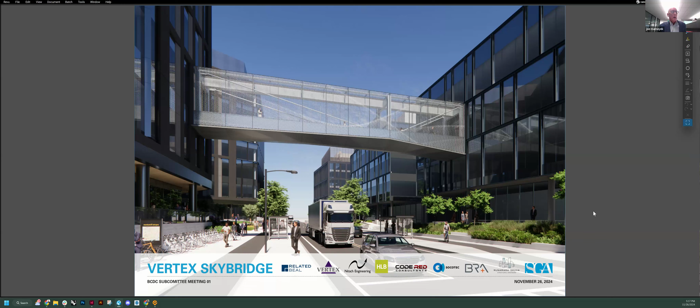Great, fantastic. We last met on 11/12, and we had a wonderful presentation, great feedback. Let's go to the next slide. These are what we heard at 11/12, and I want to focus on next steps, which is in the far lower right-hand corner, and that's essentially the agenda for today. What we've been asked is to bring a sense of scale and a scale comparison to the Liberty Mutual bridge, which you're going to see more metrics on. We've been asked to look at alternative site studies that we contemplated over the course of this design, materials, patterns, lighting enhancements, and how the bridge interacts with the public realm. You'll see that in a little bit more detail.

The impacts of the visual corridor, how that has been thought about and resolved in many ways. And then looking at some additional artifacts and materials that we looked at, 3D modeling, which we used during the course of the design. We'll share that today. You're going to see that in-depth thinking. And then last, what are the big drivers? What are the big ideas that have led to the design and the sense of beauty? Next.

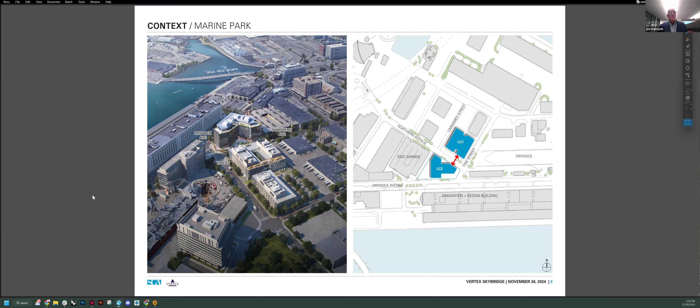Just a little bit of the sense of context. LC1 is existing. That's where Vertex Pharmaceuticals is currently. LC2 is under construction, and the bridge is, in essence, connecting the two buildings, just to give you a little context on that. And next, I just want Chuck to remind everyone of the reason for the bridge.

Yeah, thanks, Joe. So just as a recap, we did talk about this in our last meeting, but it's really important to underscore the point that the bridge is really not an amenity or a convenience. It's a thoroughfare for moving science and product from one manufacturing facility to a connecting facility that does all the reagent studies and assay studies. So they're really symbiotic in nature in terms of the facilities' requirements to have this connectivity. And that's a really important component with regards to the bridge utility.

Again, as a recap, both facilities are dedicated to cell therapies. Most importantly, our type 1 diabetes therapy, which is a one-of-a-kind therapy, a single dose therapy that is time sensitive in its nature in terms of its deployment to the patient.

I think I mentioned in our last meeting that we have a 72-hour latency from the final drug product to getting to the patient. So the importance of a quick and expeditious thoroughfare between manufacturing and the testing of the assay is really incredibly important to us getting to a full commercial capacity out of these two infrastructure assets that we have. And the other, I think, really important component is the product is environmentally sensitive.

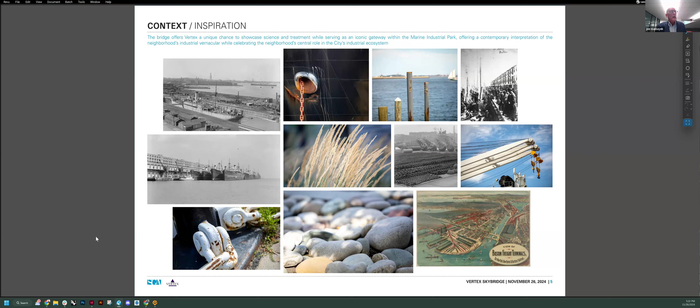And then just a quick reminder that when we're looking at this area, it's deeply rich in history and textures and landscape and features. So this becomes an iconic gateway and a moment that is really important to the project. We're looking at the contemporary interpretation of that environment, not to copy it, but look at that contemporary interpretation of the industrial vernacular.

Next, what was really important was our study and research that we did with very successful bridges in Boston. Off on the left-hand side, you can see Liberty Mutual, top and bottom at different angles. You can look at the transparency, the lighting, and the elegance of that bridge design. On the right-hand side, we have samples of the Boston University Medical Center, upper right, and lower right is Boston Children's Hospital. All of these, look at transparency.

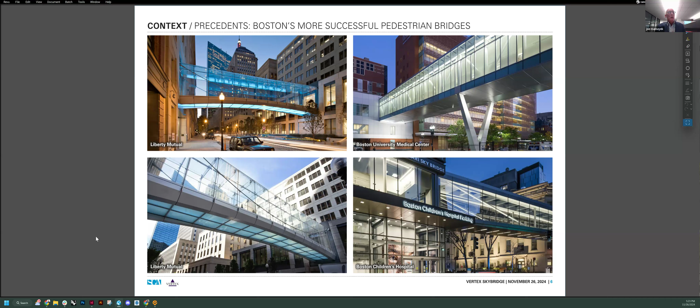It's not just into the bridge, but being able to get a sense of the mass and architecture that is beyond, which is very nice. The lighting takes on another kind of transcended feature that really gives life to the public realm, which is fantastic. And what's happening with the features that are underneath the bridge as well. I'll look at these things later on, but some of these have structures that actually go in the public realm, and they have that impact, such as the Boston University Medical Center.

For bridge comparisons and the metrics, off on the left-hand side, we have the Liberty Mutual Bridge. You can see that cross-section of the street and the adjacent buildings themselves. It's a span of 83.5 feet, 22 feet clear. It has a camber structure for the floor, and then a nice cabling structure that happens above. So you can see that.

And in comparison to the Vertex Bridge, you can see the span there of nearly 100 feet with a clearance of almost 34 feet underneath that, with the nice shaping of the public realm down below. What you have there as you enter both buildings is a sea level rise. It explains the transition over here.

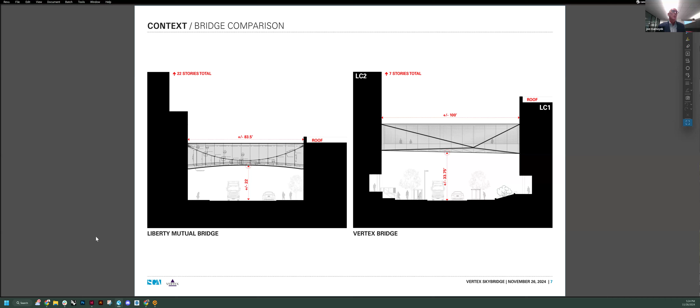The other thing that we measured, and it was really important to the design, is how the bridge itself touches both of these buildings, and having enough canvas, quote unquote, for the bridge to have some of that space around it. Next, please. Here's just a plan comparison. The Liberty Mutual Bridge up above, you can see the length, 83 feet plus. Its width is 12 feet compared to the Vertex Bridge, which has a span of 100 feet and a width of 14.5. Those are some nice metrics of those two bridges.

So a little bit about our thinking from a team design approach and opportunities. These are the three opportunities that we were looking at. The outer ones that are gray were closer to intersections, and certainly the one on the right-hand side. As that moves closer to that intersection, we're a little bit concerned about the definition of the architectural massing and edges. So it competes a little bit with that.

And as soon as we go to the preferred location, that really becomes secondary to the overall expression and experience in the urban environment, and certainly it respects both entryways. The other thing that's really important, as it moves to the midpoint, it has synergies with the programs of both buildings, which are great assets there, and also the preferred connection as it connects into the lower building, LC2. The way it hits the more solid portion of the building, you'll see it in a little bit more detail in a moment. And Joe, about halfway through.

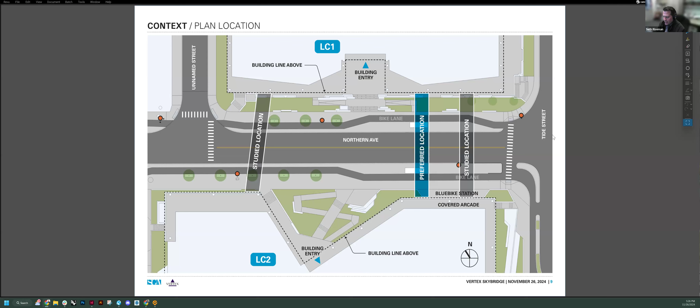Okay. Running through here, cross sections right in here, looking at the different levels of LC1 and LC2. There's a lot of synergies that are happening with the third level there because of the research and having a wonderful clearance underneath the bridge. Again, if we looked at the fourth floor, we looked at that. There's a little bit of canvas above that commercial manufacturing floor right there, in how it connects to the building of LC1. Next one, please.

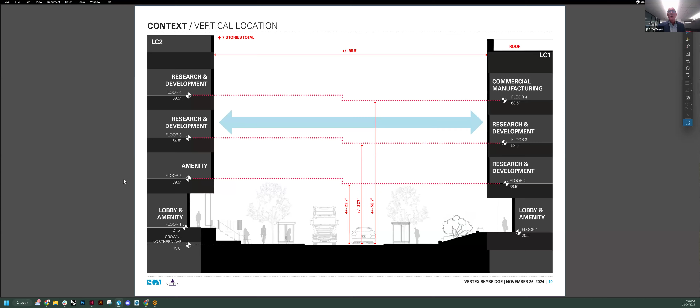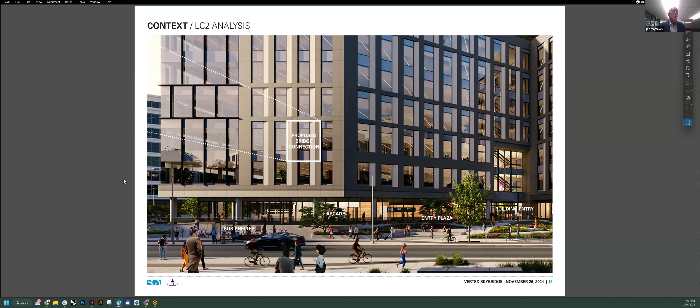Connection to LC2, just looking at where that is, respectful of structure, looking at the grid, the curtain wall. Go to the next one, please. Here, if this connection moves to the right, it's into the angled portion of the massing. Over to the left, it gets closer to the crossing, that intersection in the curtain wall. So we found a nice landing within the massing there.

Next, please. A little bit more detail here, really looking at the refined, you know, the transparency, looking at the materiality, looking at how you connect into those existing skins. And next one, please. I will transition to hand off to Klaus, who's going to go a little bit more into the design evolution. Thank you.

Klaus, you're on mute. Hi, nice to see everyone.

So you had asked about our process in the previous meeting. So we started with one of the very first exhibits that we made for this, which basically outlined 9 ideas for how we could structure this bridge, what the parti of this bridge would be. These are separated into 3 schemes, there being similarities across the rows here. So just quickly, at the top row, we looked at different configurations of more traditional truss types, building supported, column supported, and like a Vierendeel truss.

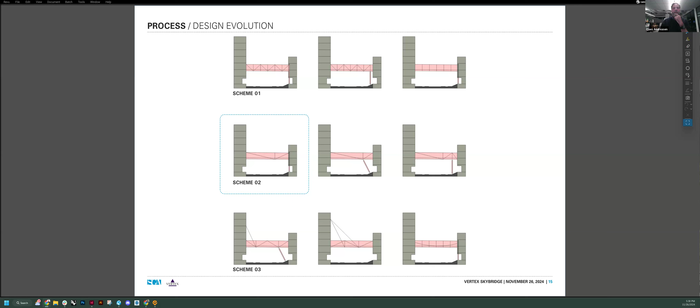So from that, we landed on 4 schemes. This is actually 2 variants of 2 schemes. So on the left, you're seeing what was the previous scheme B, but with a column, as mentioned. The second scheme envisioned that same idea, that eccentric truss, but without a column. Still in the early stages of understanding the structural implications of all these. And then the third and fourth schemes are variants on this cable structure from above.

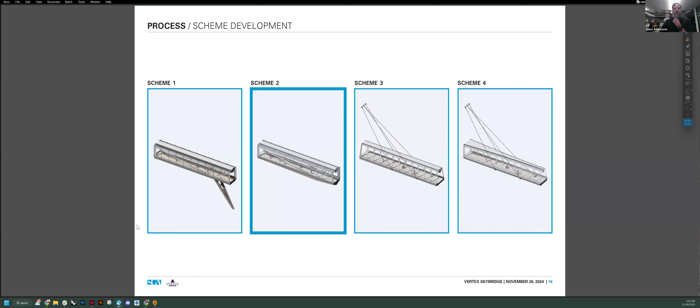So from that, we assembled all the comments that we got from the stakeholders, and we came up with four tenets for the design of the bridge. The first one is, again, that the bridge should have no supports in the public right of way. Second, that we would connect at the 3rd floor, because it was important that we had a large clear space underneath the bridge, both for the trucks and cars that are going through, especially the trucks, and also for the public realm that we worked so hard to establish in front of the new building and the old.

We wanted to make the bridge seem light, and again, that was the idea of that simple eccentric truss, coupled with a lot of the other decisions that we made about material and other things. And then finally, as Joe already mentioned, we wanted this to blend in and integrate really well with those 2 buildings.

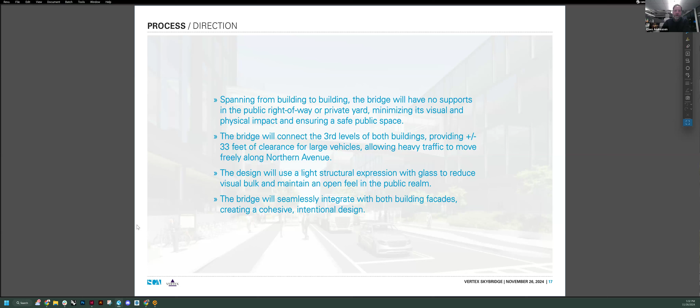So the first thing we did is think about the structure a little further. We took the upper structural long members, and we actually moved them to the center. And what that enabled us to do was really create these views from the public realm up through the bridge, much more transparent than if we had those bigger structural members at the corners. And again, that was a lot of structural work to get that to happen.

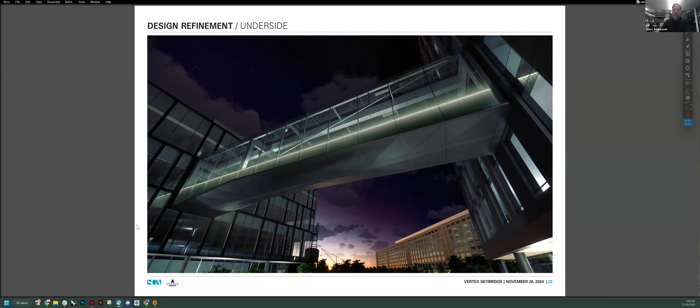Okay. We've been looking very carefully at lighting here, very subtle lighting. I know there were questions about where and how we're lighting the bridge in the last meeting. We made very deliberate decisions about this because we didn't want the bridge or the underside to be overpowering. So we were envisioning subtle lighting along the glass facade at the seam between the clear glass and the spandrel condition, and then all the other lighting within the bridge and below, let's say, shin level, so that no exposed luminaires are seen from the public realm. Here's another view of that.

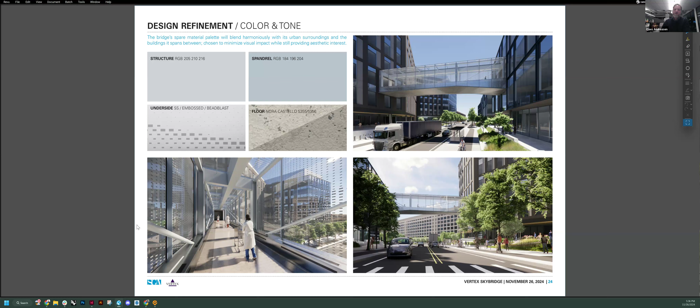Finally, materials, light and bright. We went with things that were very, very neutral, but also very lasting, like stainless steel for the underside. Obviously, our glass is triple paned, highly energy efficient, and low iron for maximum clarity. Like here's a diagram of the frit pattern, which I can get into more if you have questions.

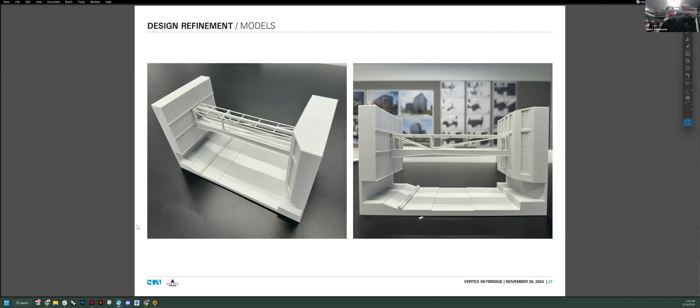Some components of the bridge. You had asked about models. We have them. I have them in my hand, which I can show everyone. These were just a part of the studies that we did for this project. And finally, some views. Hope I'm not too far over the limit. Thank you very much.

Thank you, team. Commissioners. Maybe I'll start as the other commissioners think about their comments. You know, thanks for the presentation. It feels very similar to what you showed us the last time without including options that I think we discussed at the monthly meeting. But my general thoughts about the bridge is that seeing that model was really helpful. And maybe if you could just go back to the image of the model.

I think you mentioned, earlier in your inspiration page, the industrial vernacular. And somehow I feel that the model is more expressive of that industrial vernacular than the actual renderings. And I don't know if it's the material choices for the structure, the stainless steel being, you know, so light and contrasting from the buildings that you're actually tying into, that I wonder if that is something that you looked at in terms of a different reading of that.

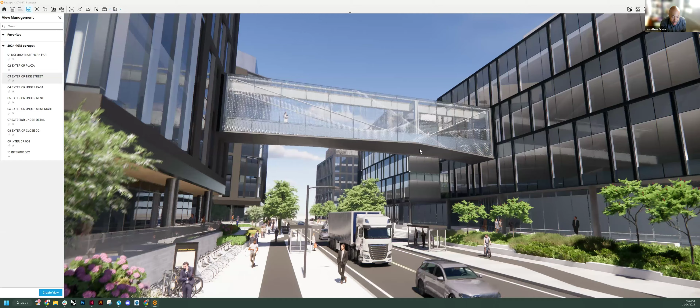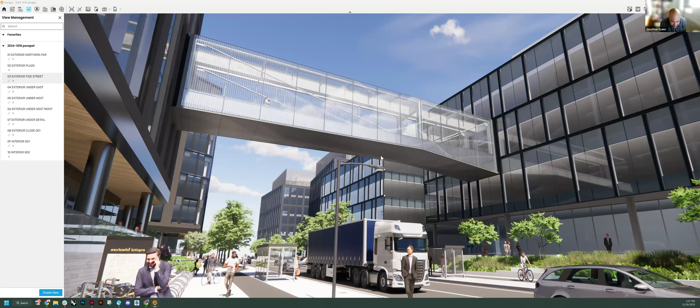Yeah, I do wonder if some of that is just the medium. You're not going to build that wrapper on the physical model, but in this render world you do lose some of that texture. So I'm trying to divorce my comments from what the rendering is giving us. That's nice to see. Sorry, I'm just watching this spin. This is certainly helpful, and even this landscape view is interesting. You can see the structure more than in the PDF and the presentation.

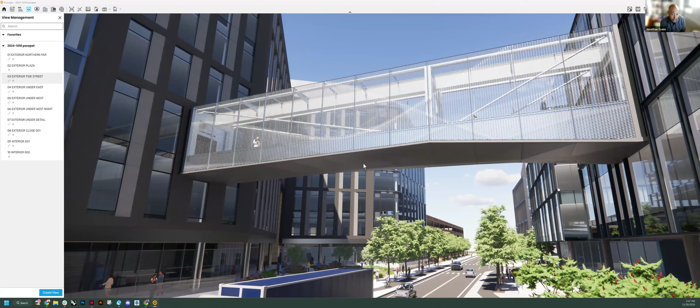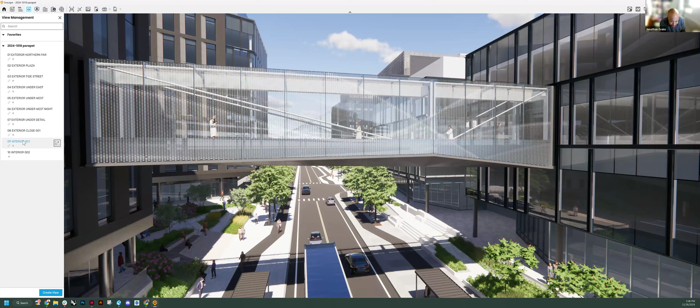I appreciated the rigor and what's actually needed to make this bridge possible, and some of the diagrams were pretty compelling. I would agree with Mimi though that, in terms of newness, you're showing us how you got to this conclusion, which I agree with amongst the four schemes. But how do we build off of this and engage the location question further, maybe questioning more so than refinement? I appreciate seeing the structure, and I'd advocate for celebrating it more. Obviously it's enclosed, but not hiding it as much, if that makes sense.

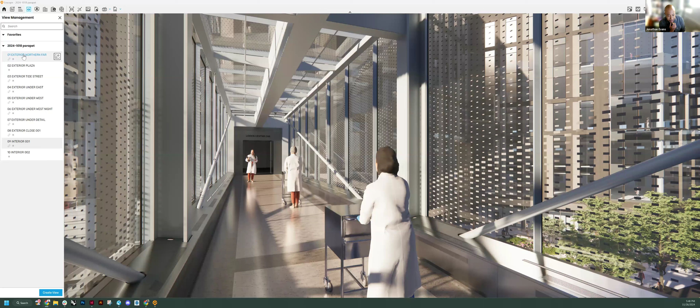I am curious, and I realize we're in a context that's not all the way built out, but what this would look like in more of a photo real or literally like a photo render where you dump this into a photograph. Again, for me, sometimes seeing everything as a rendering, it's hard to get a better understanding of the existing textures of the place. Particularly for some of those long views. Maybe I'm just stuck in the rendering a little bit too much, but...

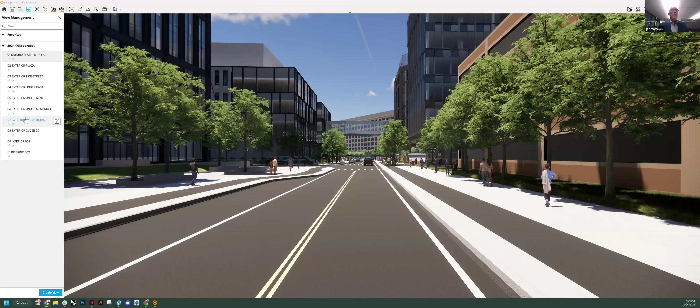So, again, Jonathan, I can understand your point here. Obviously we rely heavily on the renderings because we've got some existing buildings that are there and some that are not. So that plays into it a little bit. I do want to say that when we look at the night shots and we have the lighting, there is that opacity behind the glass that mimics where the structure is, but at the same time, in a very elegant, sophisticated way, that lighting has that gradation that helps to redefine that structural component.

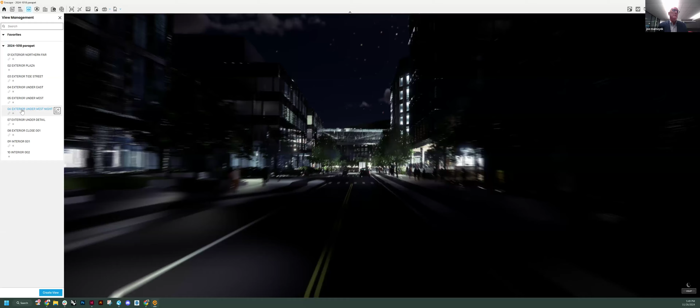But it's a layered element, which we found quite attractive in looking at optionalities along the way here. So then this was key. Why did we move that glass beyond and pull it out in front? It's just to pull that down, and then you have the solid nature underneath and it's kind of sliding underneath that glass.

So the interplay of those two things we thought was a little bit of the magic of not being so didactic and straightforward and heavy-handed, but yet doing that modern interpretation of the industrial piece, without being like this is a crane, and this is solid. We wanted to do that interpretation. So that's the art form. That's the beauty of what we're trying to achieve in doing that. Got it.

Okay. I will say, Joe, that I think that's a really successful detail where the glass does go down to the perimeter. We could talk about the lighting effect as well. But I'm curious if the structural elements, the beam supporting the roof and the angle bracing, in a darker tone would allow the bridge to feel even more transparent than it is. But I don't think you want to do that at the base where the glass slides down. So I don't know. It's hard to know without seeing iterations.

So I can speak to that one point. It's very important. We have some studies. I don't know, Kless, if you can look at that. We looked at color changes, where we have the light version in here, but we gradate it to a very dark solution. And the reason for doing that, and we can share that with you, is something Bill brought up and challenged the team with: what of this bridge makes it have a dialogue with the two buildings? And one of them was the color.

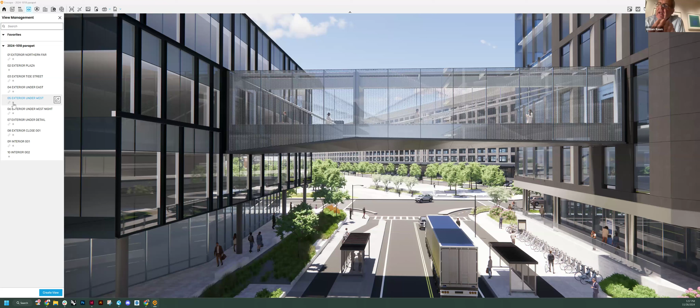Then the question of how to blend into the two buildings, I think, is a potential opportunity. But this bridge doesn't look like it's blending. The blending on the left is very different from the blending on the right, again, because of those dimensions. And there's this third issue. Now you're straightening it out, but there is a third issue, and that is the walking surface on the right is a foot higher than on the left. And so that is also something that adds to a perhaps unnecessary complexity.

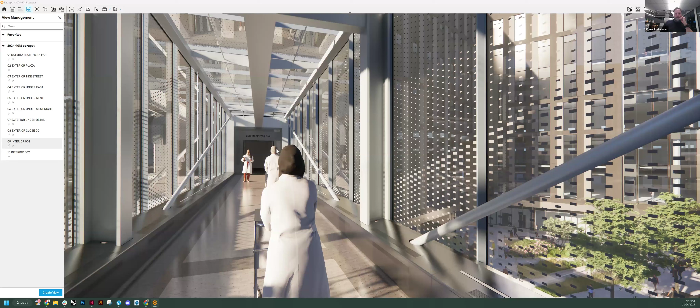So even on that question, I wonder why you couldn't get the bridge to be either, well, the building's an existing building, right? Yes. The two buildings, they're existing right now? They're real? Or are they not? No, one building's there, Lighting Center 1. So in this view, the building behind us is existing. As you're looking into this image, Lighting Center 2 is being built now.

I see. Okay, so there are ways that you can make the walking surface of the bridge parallel to the ground plane. And I think when the bridge gets out of kilter, even by 1 foot, that is something that one might try to avoid. Now, I don't know which building is existing and which is not. Do you have the opportunity to ramp up the lower side of the bridge, or is the lower side already the existing one? I don't know. Can you go back to the previous slide? Yeah.

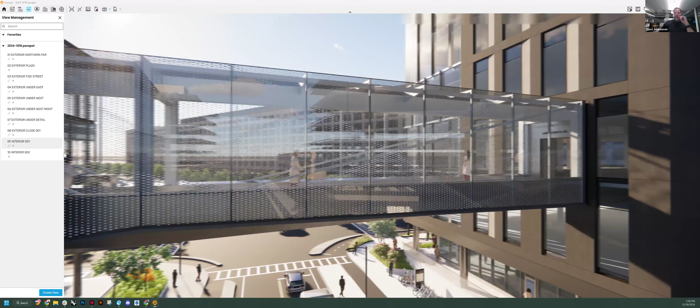The only comment I would make just initially, Bill, is that the walking surface inside the bridge slopes independent of really anything else on the bridge. So there are conspicuous points. For instance, the bottom of the window and the top of the spandrel is a plumb horizontal line, this line here, and then the undersides actually meet. Which line? That's the horizontal parallel to the ground plane? Correct. Okay. How about the base of it also?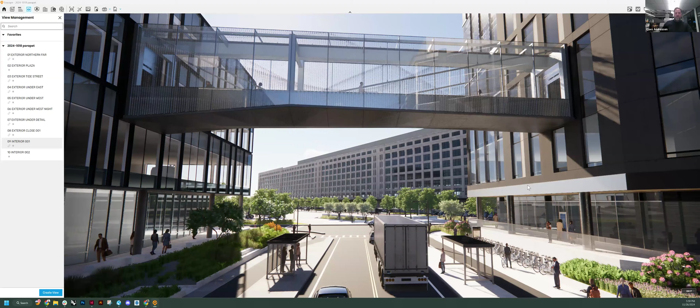So the base is because we were trying to meet these sort of datum points on the bridge. The sun is not good for this view. These lines, we've sort of created the shape of the underside based on meeting these points on the two buildings.

And that seems to me adding a complexity or a requirement that might not be necessary. I mean, because the asymmetry and the aggressive asymmetry, I think, makes the bridge seem like something else, and yet it's meeting the buildings in seemingly identical ways. I mean, moderately identical ways. There's nothing about the connection of the bridge to either of those two buildings that is at all special.

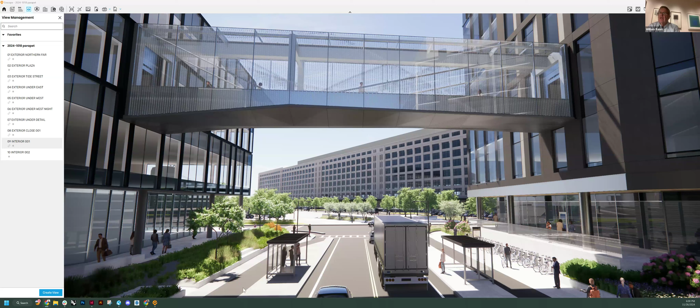And so I'm finding in each of these that I'm sharing with you a celebration of complexity that I don't think is helping you with the aesthetic of the bridge, personally. And it takes away from some of your structural ambitions. Right now I'm looking at the base of the bridge as one set of lines, and these diagonal lines are a totally different set of lines.

And I'm urging a greater simplicity now. That may seem like a greater modernism and not tying into the industrial fabric of the district, but if one's going to go with an industrial fabric, there's usually a symmetry or consistency to that. So I'm just pleading with you to make the thing more simple, and then to share with us how it does respond to the two buildings, which right now it still feels like it's simply placed in between them.

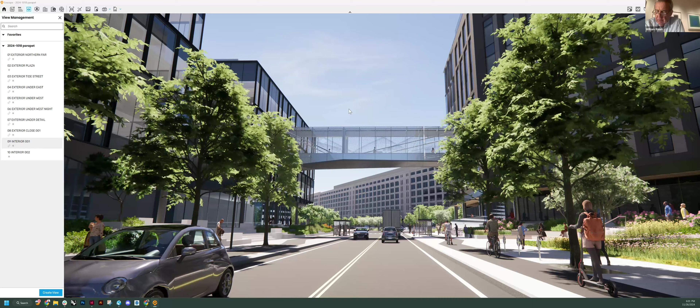And I admit this is, you know, tricky, but it's such a limited design problem that I have to believe by focusing on it you can solve it. And so I may come back with more comments, but you may want to comment about what I've said.

Sure. I think, Bill, one thing I might suggest, and when we come back to do a presentation, I'll show you a little bit more context of these two buildings themselves and how they relate to the industrial park. In the background is the Innovation and Design Building, where the grid is really king. It's relentless in its rhythm across that building, and it's quite beautiful in many ways, but it's broken up only with solid portions every so often, so you get the definition of five buildings that are connected at that point.

Here, with these two buildings, and we'll demonstrate it later, we looked at that grid and at how on the right-hand side we can play with that grid to create something a little bit more interesting from an overall massing, but at the same time relate to the lab module. And on the left-hand side, the same way, we looked at the grid and a playful grid as it moves across that facade, and then at the precast panels, which are the rest of the expression of the building. I know it's not on this side, but a lot of thinking went into those buildings that were the genesis of this neighborhood.

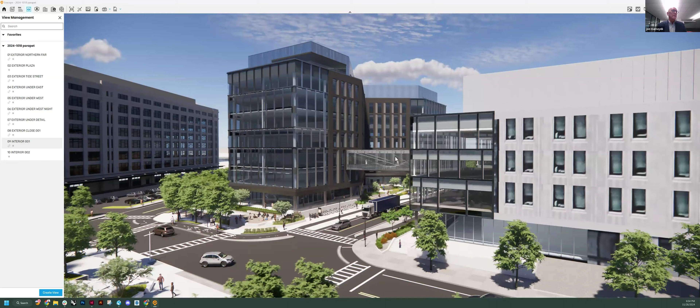Give me a couple examples of that. Well, it's right in here, the more solid portion. We looked at the grid, and then we looked at the two-story, one-story expression that goes across ISQ 3, which is on the left-hand side, or Light and Center 2. And that was a playful nature, and it came out of the studies of the building on the left-hand side, which is the IDB.

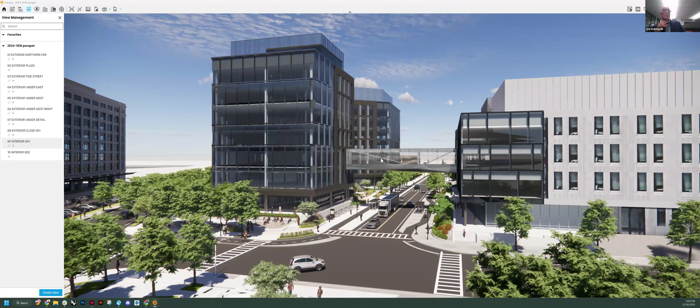You said left-hand side twice, describing different buildings. Can you put a pointer on what you're referencing? Yeah, if you're looking at the skin of Light and Center 2. Which building is that? It has a pointer right there. On the left, Bill. Okay, the left. On the left, and it's on the left side where the bridge is actually connecting.

That started out as a grid, very similar to the ID building, which is in the background here. And we played with that many different ways to eventually get something that is a grid, but something very different from what you would see historically in that area.

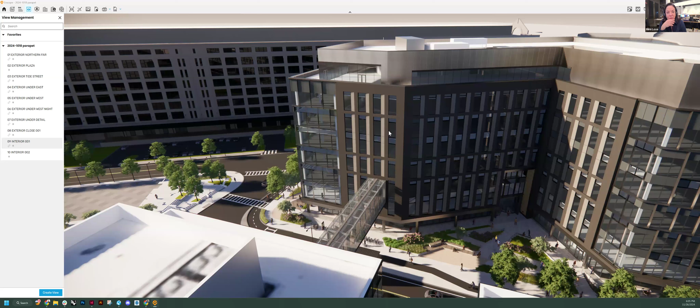Bill, can I ask a question? Go ahead. I understand that you are asking for simplicity, but are you in support of the asymmetry of all of the diagrams they suggested for the structure? That's what I'm trying to understand. Okay, I would say that simplicity implies perhaps a single asymmetry, but if it starts having two or three asymmetries, it gets very confusing. As I look at the base of the bridge, that's one asymmetry. As I look at the structural element, what are those? Steel rods or something? That's a very different asymmetry.

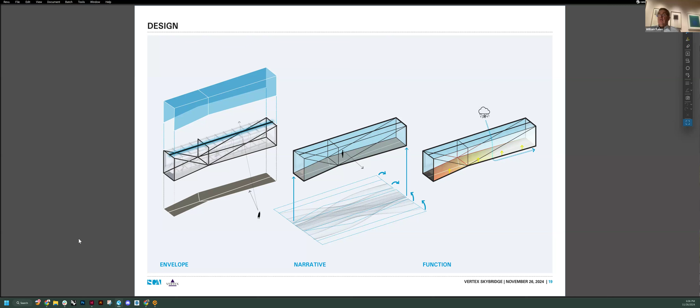And I don't see those two asymmetries leading to a greater connection of the building on the left to the building on the right, or vice versa. I'm just not seeing it. I see it as a drawing, but I don't see it as an experience of coming through under the bridge, and you're going to add the asymmetry of the frit, which is yet a third. And I think it's honestly confusing and drawing attention to itself, when in many ways the purpose of these bridges is to not be too attention-getting, or if they are attention-getting, then let's make it really dramatic.

So can the team let us know if the depth of the asymmetry that's happening on the shorter side of the span than the longer side, is that by necessity or is that a choice? Can you control that? Right. So in this image, the depth that I'm questioning is on the right-hand side, connecting to, I think, LC1. Is that needed or is that a choice?

We have a slide for this. Yeah, this one. There was a deliberate choice to create a geometry that sort of stitched together the two sides. We felt that was a way to sort of reinforce that central vertex point. And it created this pattern of triangular panels that seemed very dynamic to the form of the building.

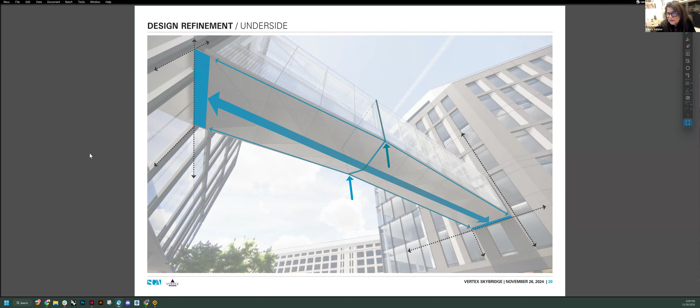Is the cross section at the underside of the bridge where we're looking at it now? I'm sorry, it's not very dark here, but is it like that and then it flattens out at these ends? In other words, is that the sectional condition there? Yeah, let me show you the... Oh, thank you. So it becomes a triangle in the middle and flattens out at both ends. Correct. So of course, that's another asymmetry. Yeah, that's why I was pointing that out, it's number 4. Number 4, it is number 4.

I just think, I'll be honest, I think you're getting too many ideas into a single bridge. And I'd choose the one idea that had the most to do with your ambition for the bridge, but not all 4 of them. Sorry to say it. If we go back to the... I'm sorry, go ahead, respond.

No, I think I'm going to come back to this sort of idea of contradictions a little bit. For us, we thought it was really important that that fourth elevation, that fourth face of the building that faced the public realm, had some interest. If you look back at some of the precedents that we showed earlier, specifically the Children's Bridge or the BU Hospital Bridge, the undersides are really flat. They're not unattractive, but they don't engage that space. It feels a little bit like an enclosure rather than a moment of engagement with that very public space that we're creating.

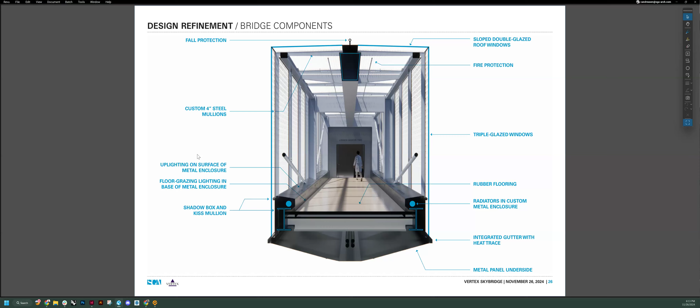I guess I would ask from the standpoint of the context, the urban context here, whether or not that fleeting moment under the bridge is really worth it, because it's introduced a lot of complexity. And then I'm going to say something that only a landscape architect could say, because the rest of the architects on this call just may think that I'm being insane. But there's this lightness of the bridge itself.

And I wonder whether or not the underside of the bridge would be better served if it were dark like the buildings, so that the comparison of the lightness between the top and the bottom, which is in shadow most of the time, would help to kind of take away one of the conflicts and have a way to connect to the darkness of both buildings.

I think, Laura, we heard that comment earlier on and you're reinforcing that piece. What I walk away with, among other things, is for us to look at the materiality, the choices, and come back to you with a few options. Here it was intentional: it's light, it's stainless steel, it's reflective. But the other option is to look at a darker surface here and see how that measures as a comparison, because you're going to get a different feel.

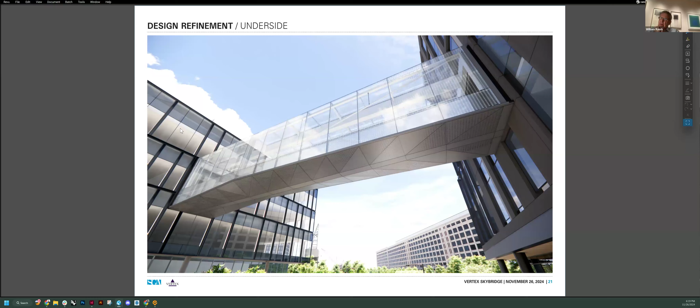For instance, why wouldn't the vocabulary of the bridge going into each of the two buildings be more interesting than it being attached to the edge of two different buildings, as it is right now? Or arguably, why couldn't each building reach out to the bridge and represent itself as it grabs a hold of the bridge? It's just sitting on the edge of the building, and that started with your first rendering, and it sticks with me that it's connecting two somewhat different building forms.

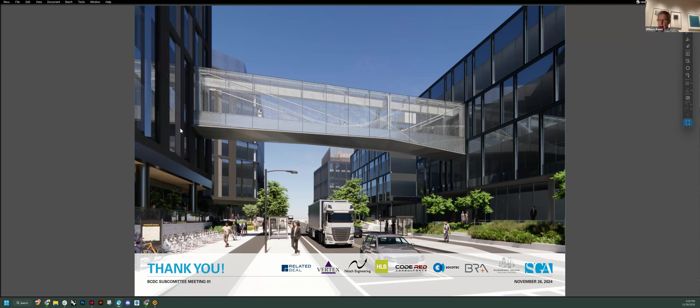So, Bill, are you thinking about a more expressive joint between the two buildings, and that the joint might be different? Well, that's certainly the implication of what I was saying. I'm trying to respond to Laura's correct observations, and what I'm hearing her saying about the fact that this bridge should be connecting these two buildings, if I heard her correctly. And I'm seeing this bridge looks like it's been plopped down and bolted to each building, rather than engaging each building.

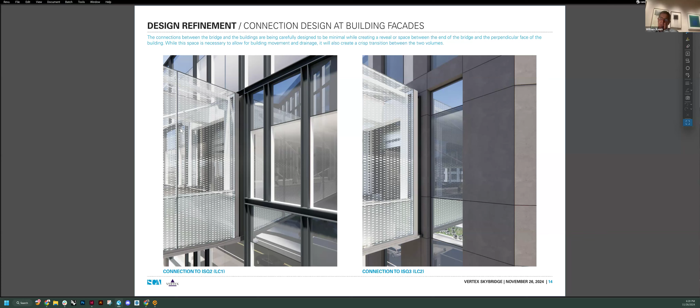Now, I know you have one building already done, so how you engage it is beyond me. And you have another that has working drawings that are operative. And so what I've just said may not be feasible, but just finding what I've said before. So.

I guess I appreciate the question, Seth, as well, about how can we provide maybe clearer things to test. And I certainly acknowledge that we've collectively said make it simple and dynamic, make it light and heavier. So I acknowledge that this is a tricky thing to wrap our heads around. Maybe the only thing I'll offer is I definitely appreciate the intent around a ceiling, and again, this is where things can be somewhat subjective. I think there's things that can certainly be tested to Bill's point and be simplified and cleaned a little bit, because I think there might be too many layers of things going on.

But I think the ambition of doing something there, I don't want to dilute that too much. And I think if we make it so simple, then why are we doing it? So I think this is an opportunity to do something. So again, hopefully that's not a very specific thing to test, but I do think some of the conversation around making this thing tighter, cleaner, I'm all for it, but I also want to not lose the dynamism that is so inherent in what you're trying to do here.

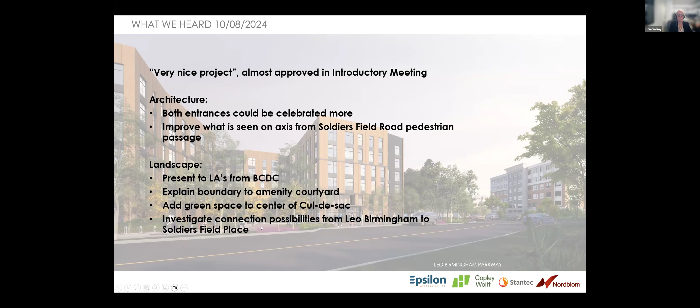And then improve what is seen on axis from a pedestrian passage down below, which we'll go into in a minute. But for landscape, they also mentioned this boundary to the amenity courtyard up on Leo Birmingham Parkway, give them more information about that. Add green space to the cul-de-sac down below and investigate connection possibilities from the top to the bottom.

If you don't die when you try to cross that right now, because it's a huge expanse of parking and it feels very dangerous, but that will change. And you can walk or bike over to get to Boston Landing, the T, and downtown. But you can also take buses to Harvard Square. It's really a fantastic site on the edge of this neighborhood.

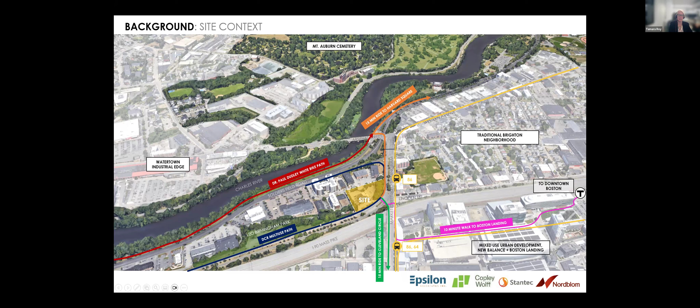There's also a park, which is being improved by Copley Wolff. And with me is Ian Ramey from Copley Wolff, who is our landscape architect. So he also knows a lot about the improvements happening to that DCR park. Okay, so just a timeline.

Really, it used to be a completely pastoral site, and then we began the man versus nature battle, which we are still in. And it was then an abattoir, which is, I always forget this name, a butcher house, slaughterhouse. Yes, very stinky. And then it got cleaned up as part of the City Beautiful movement by the Olmsted brothers, the sons of Olmsted, and turned into this wonderful racetrack and place where people would bike.

Then after that, in the 50s, it was mostly developed and surrounded by parking and vehicular movement. And now DCR is actually doing a road diet, and they're shrinking it to just one roadway with one way in each direction, plus a lot of green space, which is right in the front of our site, with a multi-use trail. So that's really fantastic.

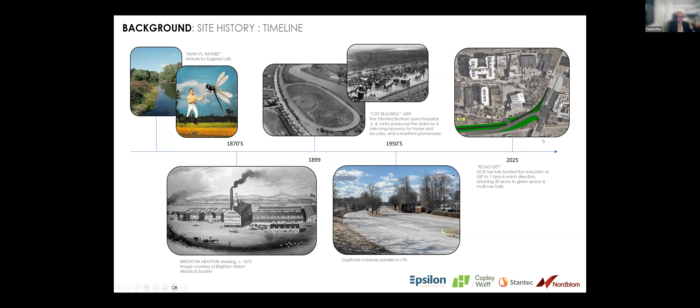These are some existing photos. So if you're on the upper level, as we said, just lots and lots of parking, but this whole side is pretty much going away and being incorporated into our site. The street is actually ending up centered because of the way it needs to connect to the intersection. But it is going to be here with more green on either side.

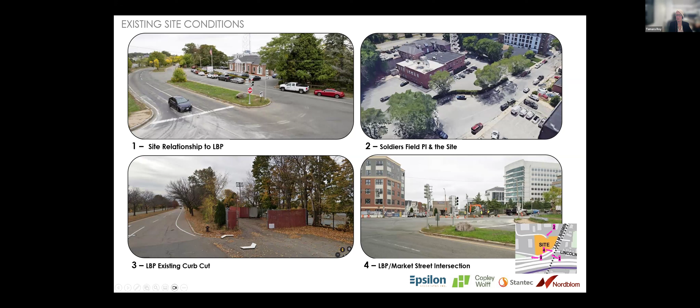Soldiers Field Place is very much a vehicular experience with some existing trees down there at the edge of our site and lots of new projects down here. Again, the entrance to the park is not so nice right now, and then that Market Street intersection where you can walk across and get to the T.

It's really interesting designing this, trying to really keep the trees, and that pushed our parking onto a couple of levels, but being able to snug them into the site slope with an entrance on the upper side only. And then developing these wings that go over the parking. And this wing turned so that we can save all of these trees.

And this is a south-facing courtyard for our residents, so pretty amazing orientation, again, opening that up. And then the greenery that we are now having added to the front of our site based on the multi-use trail. And then our architecture, which we call anti-box architecture, where we've added some nooks to the backs of the units for work from home.

And we've developed a whole series of interesting unit types that create these kind of angled sides to the building. This is the existing site, looking at it sort of from the top level and that drop of 24 feet on the site slope. Just some materials here. We're really reducing it down to a very few materials in our palette, which is this wood tone and charcoal panels, and then some graduated pavers at the entrance. And Ian will go into the landscape a little bit later.

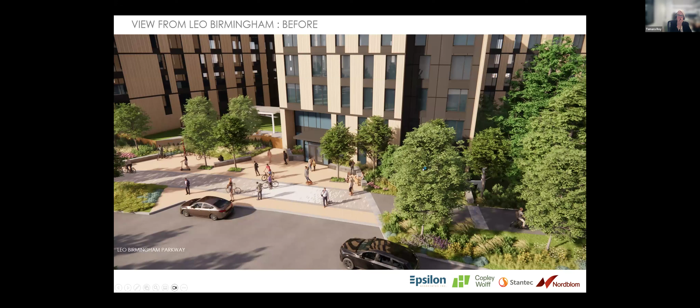Tamara, I didn't know if you wanted to talk about the facade at all here. Well, this is the view that we showed the last time, where we sort of heard that maybe our entry was just a little bit minimal compared to it being sort of our front door. So we wanted to show that, and this was also the before that we showed last time. And then this is as well a different view, sort of from the bird's eye. And again, just sort of this is what we showed before.

And so, yeah, Ian, I guess I'll continue here. Sure. We just thought, well, we had actually heard from the neighbors, how about adding some color? That they see this sort of coloration in a lot of projects around the city, and that they'd really like to see just a little bit of vibrancy near the entrance. So we actually pulled out these pillars here a little bit farther. We extended the roof canopy so that this isn't just like kind of a little bump, but it actually expands all the way across. And we created a covered seating area for folks to wait for their Uber or other things to pick them up.

And then I'll let you, Ian, explain the other changes. Sure. So you can see how we're really directing the crosswalk in a smaller footprint across the multi-use path. We have our drop-off area with the sidewalk there, and then the path continues to the right, kind of nestled in landscape.

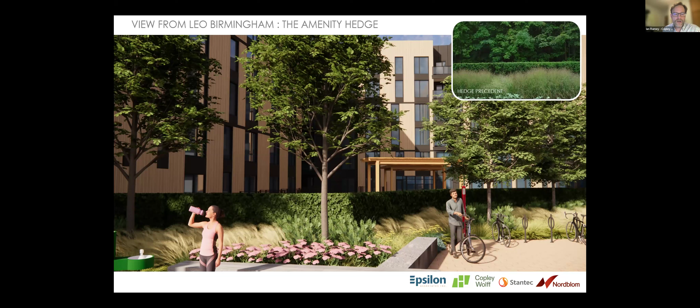And then one of the other comments that we heard in our intro session was trying to understand the interface between the public plaza that's along the parkway and the resident courtyard that's into the building. And so our concept, our design vision is to have an evergreen hedge that basically follows the fence line. We want it to be well buffered and screened, but not to be a hard edge. So the idea is that we have this kind of architectural green that is sort of a crisp line that separates the public from the resident area, and then in front of that really crisp hedge we have our sort of extended grove and our naturalistic landscape as a counterpoint.

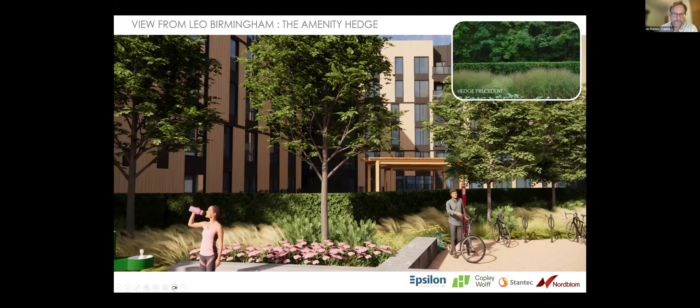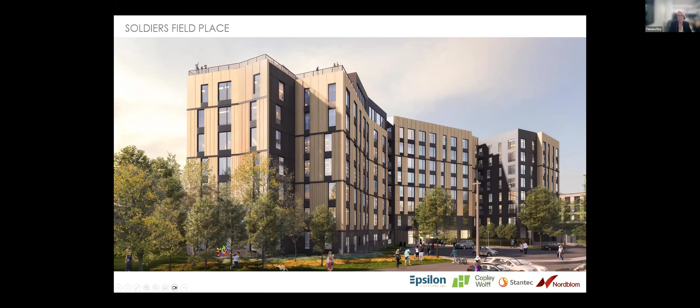Yep, and this view shows, as if the sort of hill wasn't here on the left, the architecture as it kind of bends around to the lower level of Soldiers Field Place. This again was before, and you could see the commentary of sort of how do you find the door to this side. We had maybe been a little bit too minimal about it. And so zooming in, we had this as a front door. Now this is an existing tree that we want to keep, and so our pathways kind of go around it. And there's our dog play area.

And so again, just making a little bit more of it, taking some of this warm tone and making a frame for it, creating some color at that door, just sort of helps make it feel important.

And just under a minute left.

Yep. Okay. All right. So then we were asked, what about the pedestrian passage that comes from Soldiers Field Road between two permitted projects that are built or are almost finished? And here was the view from 44, where you walk through this little passageway.

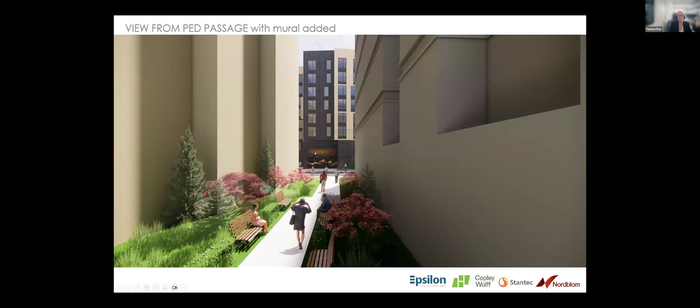And right now on axis is our loading dock. So we thought, okay, we'll take a view here. We assume this is sort of a greened passage, and we have 2 loading dock doors. And one of the things that the community asked us was, could you find a place for some murals from Allston artists? So we thought that that might be a nice way to end this axis. So that's our proposal for that.

And I'm going to hand this to Ian, because this was the one that the BPDA chose. That's right. Yeah, we found out on Monday that this was sort of the preferred version, and it's still very conceptual. I think there's a lot of due diligence that we need to do to figure this out. But the idea is that there would be an accessible ramp, a series of ramps, about 360 linear feet to make that vertical grade change, that would come off the end of the cul-de-sac and weave and wiggle through the existing trees up the very steep slope and get us up to that intersection.

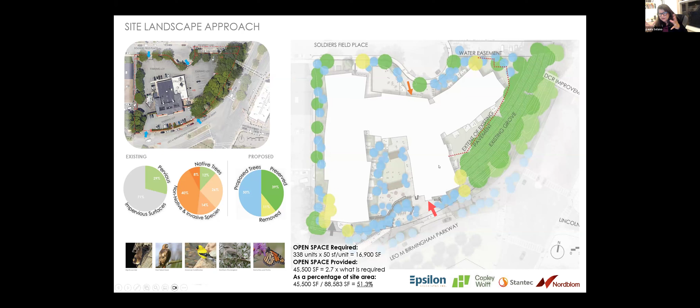So go back to the slide where you had the concept of being in the woods, embedding in the woods. Do you mean maybe the sketches? It was very close. There you go. So, you have such an unusual site for the city, right? And it's a remnant of what used to exist along the Charles River, right? Correct. You've got that slope going down, right?

If you had a string, you could sort of see what the natural topography was before that. And that's so unusual. And I'm so happy that you protected that, because I think that it really holds the corner and also starts to make that connection that you're doing with the boardwalk going down as well.

But I wonder if there isn't a way to better embed other parts of the site so that it feels like you're reintroducing and strengthening that sense of embedment within the topography and the planting, right? Because the thing that makes up the woods that you've identified is both topography and planting. It's not just one thing or the other. So the central courtyard kind of feels like you've erased that, right? Like it didn't exist. And if we could now go to the images that show the views into that courtyard.

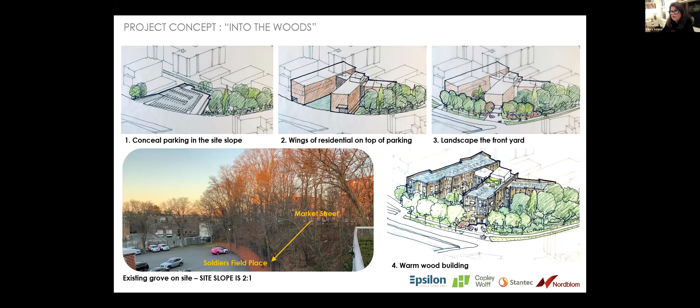Sure. And as you're finding that, just to check here, the idea is that is an area for the residents, right? That's correct. It's not a public space. The public space is outside of that. That's right. And likely there may be a pool right inside that, so we wanted to buffer that well and have it be private. Is that why you need the fence? Because it may be a pool? Yes. Okay. Because I'm kind of wondering whether or not, dare I draw? Hang on a second.

There you go. So in this courtyard, I'm going to do a cross section looking that way. This is the courtyard. You might think about doing topography in either a wall on the other side or just bringing that grade down so that this front space feels like it's held and that you really are making a space for the public that is just as interesting. And in fact, what you're doing here, wall or grade, is providing that bank back down for them as well, so that you get a chance to have a wider green that maybe can start to imitate

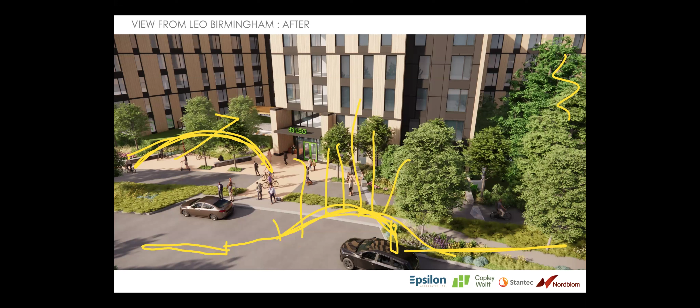that kind of density of the trees here. Oh, interesting. There's not really much reason to leave that space open. Why not densify it? Why not make it work on both sides of those spaces, right? So that each of them feels whole, so that they're not really just separated by a wall, by a fence. And if you needed, you could add a rail to the top of the wall to keep that 4-foot change that I know you need to surround pools.

But it brings back maybe some of the stone that might be embedded. It can be any material, but I was thinking, what if it's stone, and does it have a bench in it? Is there a way to really make the front work hard and feel like you've carved the building out of that landscape? Yeah, that's really interesting. And on a technical level, I believe the garage below extends under, so we do need to gain some vertical anyway to get over the structure. So maybe that's a good mechanism to do that as well.

Yeah, and I wonder if you just take a journey around the building and see whether there's a place you can start to densify the trees, so maybe you don't necessarily have to split this space with a small bed on the other side, but sacrifice some of this to make this thicker, for instance. Because we know the vegetation just is miserable in the city. It just is. It's going to get salt and it doesn't have enough soil.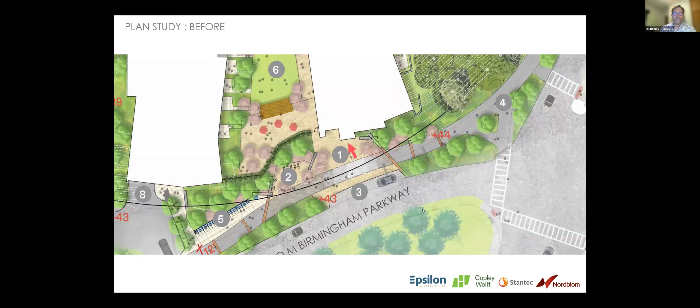And Laura, while we're on that, I'd ask the proponent team, is the bikeway on your property or is that part of the DCR improvement? I was gonna ask that too. Yeah, it's partly on our property, half on and half off, because the drop off pushes a little bit into it. You can see here that black line, that arc is the property line. Okay, so this is something that we can indeed look at.

And I wanted to ask, since you're working on the site next to this, to the left of this, which is a great opportunity, right, to kind of bring those ideas across. So what is, just generally, the idea for that, and how does that connect? If we're looking at context, how does that connect to this property? Is there a bigger plan that you could speak to?

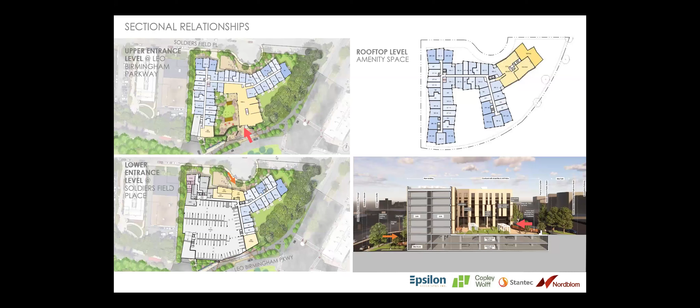Yeah, there is a larger plan. I don't know if we have it in the slide deck, but basically it's a 12-foot wide multi-use path. It'll be asphalt primarily. It's going to kind of be parallel to the road diet that's happening; they're basically taking two barrels of the traffic and turning it into one. And then they're adding a green strip and adding this multi-use path that's kind of parallel and meanders through this open space. So it's gonna feel like it's pulled through your site.

Yes. And then that park, is that recreation or some other use? It's recreation. It's DCR. It'll be mostly lawn with some new shade trees and preservation of trees. And then there's an existing bocce court that's going to get refurbished by DCR. It's pretty low key, traditional. Yep. And then if we could go to the new and improved or brand new

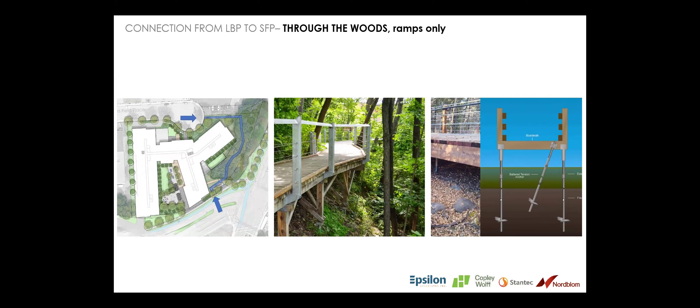boardwalk that goes across that slope. Boy, that is a tricky one, isn't it? I think your instinct to keep it in a very light structure is actually better in the sense that when you're in it, you're going to feel like you're floating in the trees and above the trees, right? So it's a much different experience than if you have something hard next to you, like the other scheme that you were talking about. And of course, that would disturb so much, whereas you can just rest lightly on the ground.

Is that handicap accessible? Ramps and landings? Yeah, that's what we're struggling with the most, frankly, because it's a series of 1 in 12 structured ramps. So it's pretty daunting for a non-able-bodied person, even though it may be code compliant. It's a lot of vertical grade change to ask someone to surmount. Yeah, and I was gonna suggest that maybe you have pull-offs. I know this is a really early scheme, but think about a pull-off where you actually could stop and look at the landscape as well. It's not just for those, like me, who would need a rest.

For sure. Yeah, every so many landings we did a little bump out. It's kind of hard to see on the red, but that was what we were getting at there. And one of the other comments we received from the staff is we had shown this sort of intermediate stair that would get you off halfway. Oh, got it. They recommended that we don't do that.

So maybe in your path, you might think about, can you actually make a pull-off that's not just an extension of that? This is obviously going to be at a different level than this, but maybe it's a way to have a more gracious pull-off, like you're hanging in the landscape sort of. And you don't need that many, right? You're going to judge how often people need to pull aside.

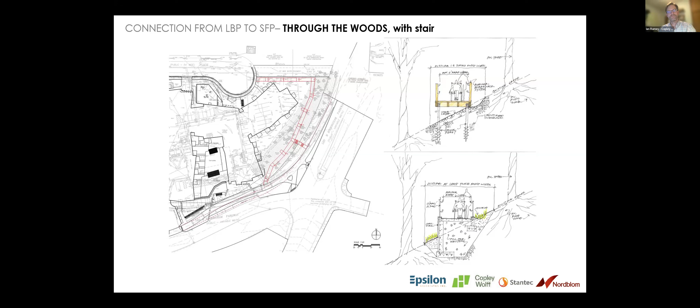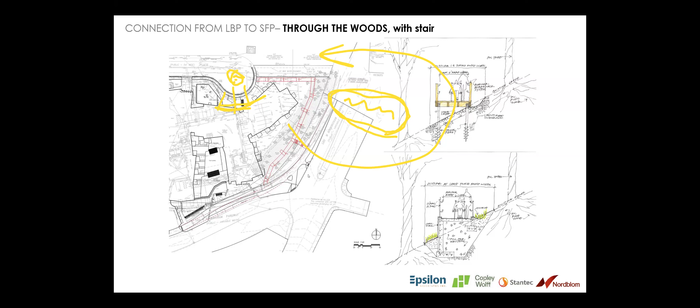You know, just make it more interesting for them as opposed to just something flat. And then my last comment is, you can just leave it right here, is this. I'm wondering if you can, and I know you have to do templates, but I'm wondering if you can look at a shape that maybe pulls out a little bit more so that you... With the traffic flow, yeah. I see that this is the way you go around, right? So this isn't cutting it off, but you also get a little more green to look out on, right? If that's extended a bit. So that's all I got for you.

Thank you. We needed landscape input, so that was fantastic. You're talking about that one, right? So you're saying maybe make it a little bit more of a keyhole shape. Yeah. I mean, I don't know what I'm drawing, but... Teardrop. Okay.

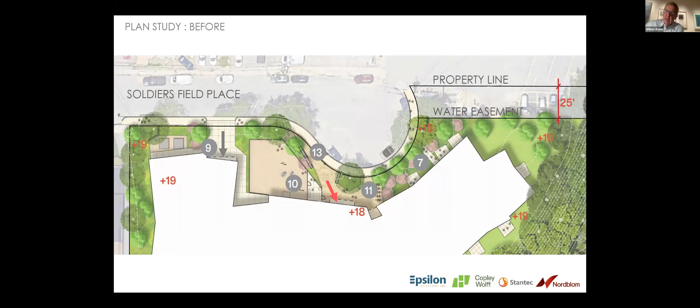Okay. Other comments? Bill? Yeah, let me just very briefly compliment you, Tamara, on a really nice project. And I just want to applaud the kind of clarity of thinking that leads to a simplicity in form making that in all places is very thoughtful and nuanced. It's a brilliant project, and I hope we can approve it soon enough. Thank you. Coming from you, that always means a lot, Bill. Oh, don't say that.

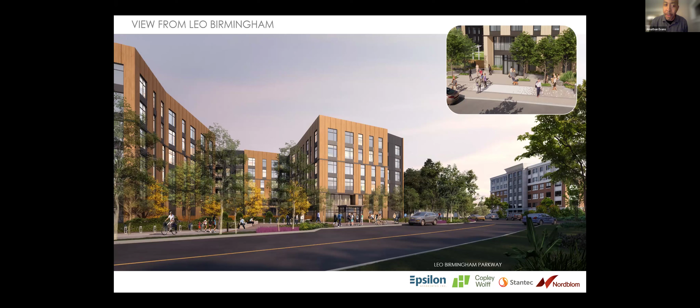Yeah, I would echo that. I appreciate the rigor, the simplicity, but the impactfulness of the architecture. I think one thing to keep pushing, the entry could still use a little bit more. I think that's maybe your one moment where you can have a more meaningful exception from the core diagram you have here. But again, I have confidence that can be further developed. In that one moment, maybe there's more of that sort of green on that wall, something more to really call that out from the field you've created. But again, that's something I have full confidence in the development of.

Jonathan? I'm glad you said that because I was feeling like I was going to be a little bit nitpicky because I really think this project is great. But what's interesting about what you've done with the entry piece here and at the rear is that you've made this wood panel have form instead of just being a flat panel. You're very rigorous that it's a flat panel everywhere except at these entries. And for me, it feels uncomfortable, especially if it's going to be a phenolic panel or something, the seams aren't going to come together convincingly.

Oh, interesting. Okay. I just wonder if it should just be the dark metal panel or a dark brick. The three-dimensionality of those wood panels seems wrong. Oh, interesting. Yeah, we could try that. That's a great point. Maybe we could make them more thin walls that come out and they're gray. That could be great, so that you have like three of these planes.

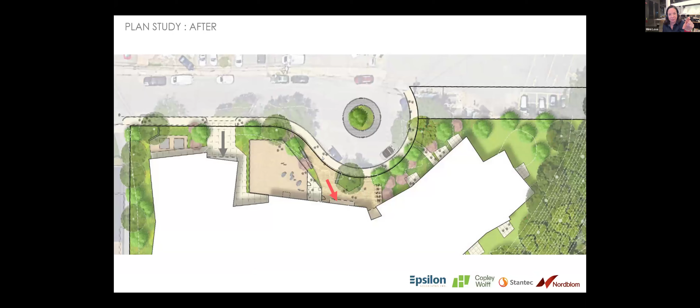And if you go to the back image on Soldiers Field Place, you have that darker base that I think is pretty successful here, and you didn't carry it to the front. These are all your choices, but I feel like that lands the wood panel better. On the side. Okay. Yeah, no, in terms of the architecture, I think it looks great.

Okay, commissioners, are there any more comments before we open up for public testimony? The only comment I'll say is I think that boardwalk, it's a lot, but I do think it's essential in order to get the connection. And we did see that in the chat through a public comment, that I'll read into the record. And so, while it does seem like a lot and a complicated detail, I do think experientially it will be a very, very nice amenity for the residents along this whole area.

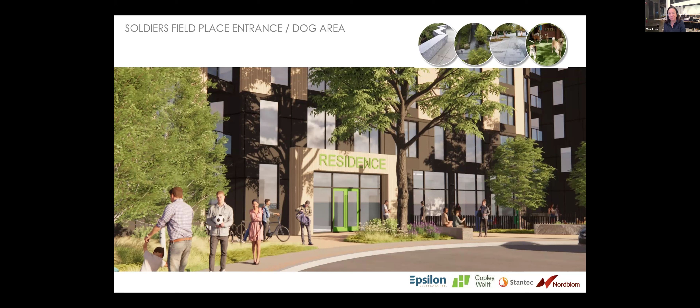Let me add, Tamara, that you mentioned these little nooks on all the units for people working out of their homes. So you'll have to share that with all of us, your little secret. I know. I don't want to. No, it's totally our secret.

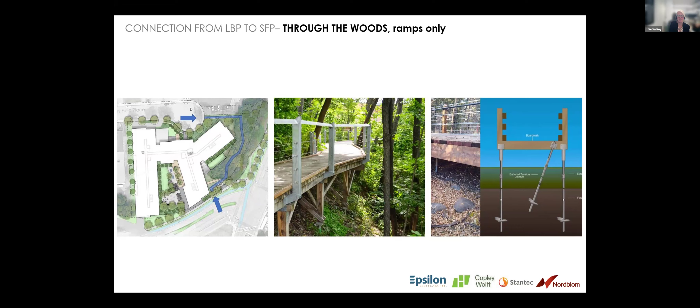Because look at this. This was very early on when we did this very first study, and it was a whole bunch of boxes, right? And we really tried very hard to make this variety in the unit types, where we could just scooch the living room and kitchen up and create a little nook behind it, with that little extra bit of tilt of the facade. So each unit does get that kind of interesting flair to it. Makes it fun for the unit types.

Surprisingly, I mean, if the fellow who is Swiss who designed the units with me on this project was here, he would say it's amazing how few unit types there are that are put together like a jigsaw puzzle to make this. So.

I think we're ready for public testimony, Seth. Okay. Just change screen.

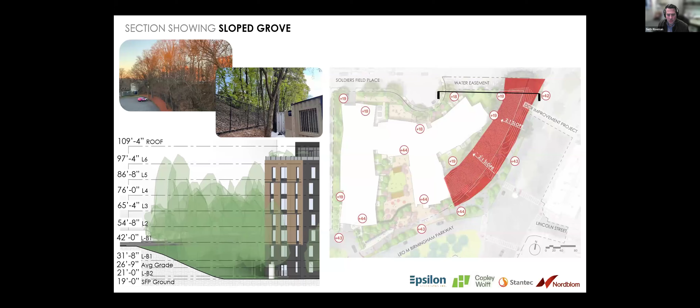At this time, we'd like to invite any members of the public in attendance who may wish to contribute public testimony to raise your digital hand, and I will call on you. If you're calling in by phone, dial *9 on your dial pad to activate the raise hand function and dial *6 to unmute yourself. Please state your name and any relevant project affiliation information. Please keep comments to 2 minutes.

I am not seeing any hands, so I'm going to stop the live comment period and read into the record a comment made by someone who had to depart, Christine Variel, apologies if I got that name incorrect, who is a member of the IAG for this project. "I have to leave early, so adding my comments here. I'm glad folks brought up the connectivity issues. I own at 21 Soldiers Field Place, and having a public connection from Soldiers Field Place up to the new Leo M. Birmingham shared use path and greenway would be crucial.

As of right now, you have to walk up along the SFR off-ramp to the Market Street, Leo M. Birmingham Parkway, and on a roadside without a sidewalk to get to Leo M. Birmingham, where the bocce courts are. It's precarious and kind of dangerous. This is my main ask as an abutter, plus keeping as much of the pickup, drop off, and deliveries off